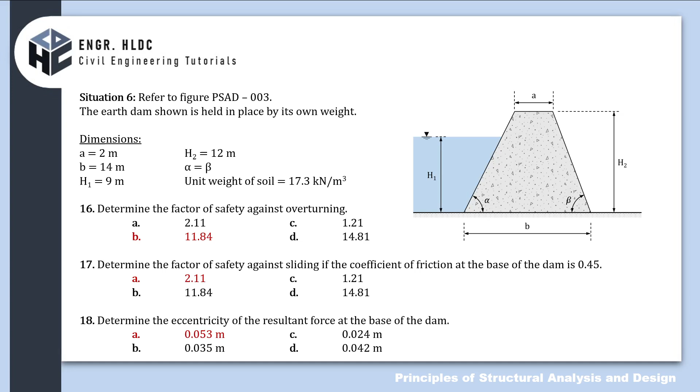Situation 6: refer to the figure. The earth dam shown is held in place by its own weight. We have dimension A equal to 2, base dimension B equal to 14, height of water on the upstream side is 9 meters, and total height of the earth dam is 12 meters. Alpha is equal to beta, so this becomes a symmetrical trapezoid. The unit weight of the soil is 17.3 kilonewton per cubic meter. What is the factor of safety against overturning? Next, the factor of safety against sliding with coefficient of friction 0.45? And determine the eccentricity of the resultant force at the base of the dam.

You might say, sir, analysis of a dam should be under hydraulics and geotechnical engineering. Supposedly, that's how it should be. However, this is from the board exam, so literally it appeared under structural. Why is it under structural? Maybe because what we're analyzing here are forces, and forces fall under engineering mechanics. So basically that's probably the reasoning of the examiner for including this in PSAD. But we can definitely handle this, class.

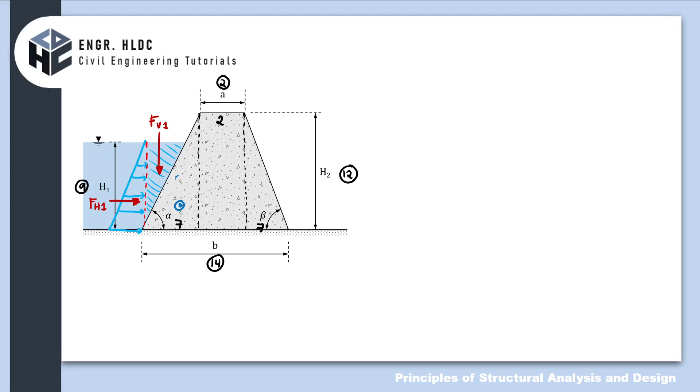Let's call this Weight 1. The centroid of this rectangle is here—let's call it Weight 2. And the centroid of this is here—let's call it Weight 3. Since our section 1, class...

Okay, wait. Since section 1, which gives us W1, is the same as section 3, which gives W3, we can say that W1 equals W3. Also, nothing was mentioned about uplift, so we don't need to consider it.

Alright, let's solve the forces one by one. For FH1, as you may remember from fluid mechanics, it is gamma times H-bar times area. We consider the area as the vertical projection of the dam wall. In this case, gamma is 9.81 kilonewton per cubic meter, and H-bar would be half of the total height of 9, so it should be 9/2.

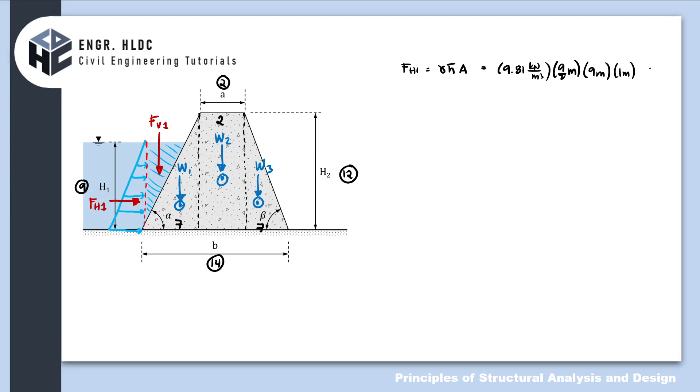And then, area perpendicular to the paper would be 9 meters high by 1 meter width. So, let's store this as letter A.

Okay, so next class, FV1 is the weight of the real fluid, which would be represented by gamma times volume. So we have gamma of the fluid is 9.81 kilonewton per cubic meter. So what would be the volume? Let's start with the cross-sectional area.

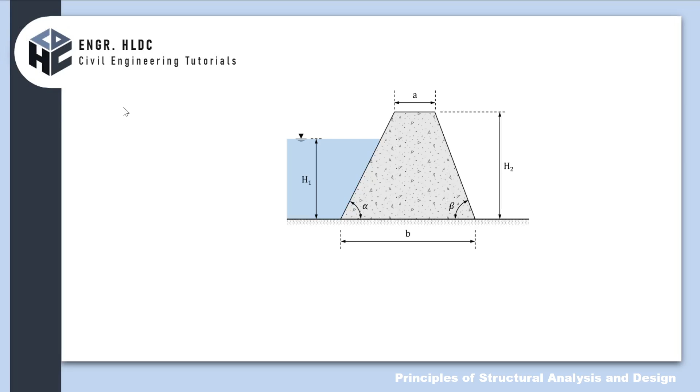Next, weight 1, it's the same thing, gamma times volume. But in this case, since we're dealing with weight of the dam, read carefully class, because it might be mistaken for concrete. It says earth dam, meaning it's made up of soil. So the unit weight we'll use is that of soil, not always concrete. Let's use 17.3.

I didn't put the units since we already practiced that on the first two. So gamma times volume: 1/2, base is 6, height is 12, considering 1 meter width. Let's put this as C. And then weight 2: gamma times volume, again 17.3, with volume being 2 times 12 times 1. Let's store this as D. And weight 3, by symmetry, it's equal to weight 1, so this is the same as C.

Okay, let's start, class. Let's talk about factor of safety against overturning, call it Fs sub O. Factor of safety in general is the ratio of the resistive forces, or your allies, divided by the forces that will cause the failure.

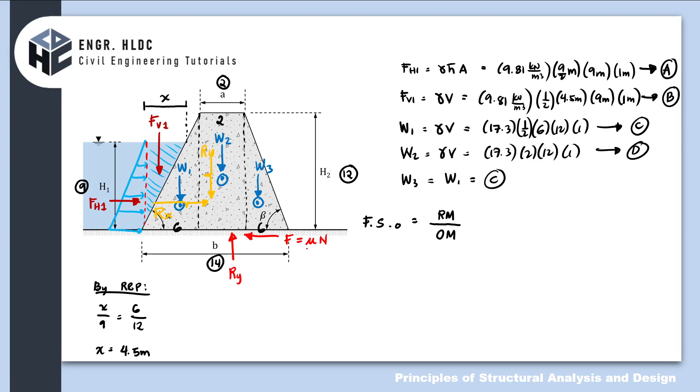Basically, this friction offers Rx too, provided Rx is small enough. But let's talk about the limiting value of friction. From your statics, class, the maximum friction that can be developed may be the value of mu times N. Remember, this is called the limiting static friction. Let's be specific: this is mu sub s times the normal force. This means it's the maximum amount of friction it can offer, but it doesn't mean this is automatically what it offers.

For example, say the force is only 100 kN, and its capacity is 500 kN, then it only offers what's needed, so if it's 100, it offers only 100. The purpose of this limiting static friction, as you may remember, is to know whether it will slide or not. For example, if the limiting value is 500 kN, but the horizontal force here, resultant Rx, is 1,000, then because the push is stronger than the resistance, it has no choice but to slide.

Okay, I think we understand that now, class. So let's put it here. Who will be Rx? Our Rx is basically just FH1, which we already stored in A. While our Ry would be the summation of all vertical forces, that would be B plus C plus D plus another C — that is, FV1 plus weight 1 plus weight 2 plus weight 3. That would be the next step. Actually, first step: solve the forces. Next step: solve the resultant/reaction.

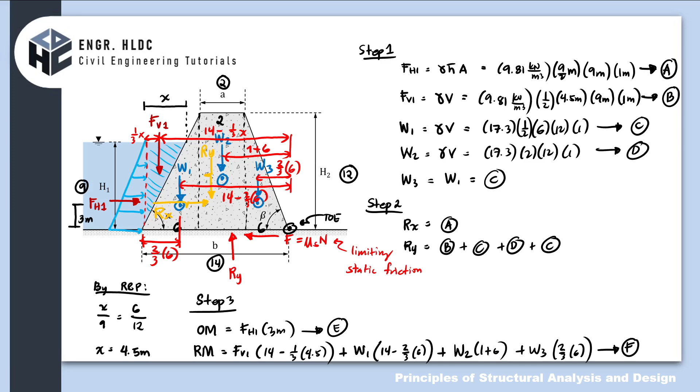Okay, so what do we do first, class? Let's store this first. So we have 9.81 times, which is like 9 squared, divided by 2, and then times 1. I won't type that out, let's just store it in A.

Alright, so next, 9.81 times 0.5 times 4.5 times 9 times 1. 9.81, 0.5, 4.5, 9. So store that in B. Okay, next, 17.3 times 0.5 times 6 times 12 times 1.

Let's put that in C. Next, 17.3 times 2 times 12 times 1. Let's store that in D. So next thing to store is the moments.

So FH1 is the value stored in A, times 3. Let's put this in the overturning moment, E. Next, FV1, which is stored in B, moment arm 14 minus 1/3 of 4.5, plus W1, which is stored in C.

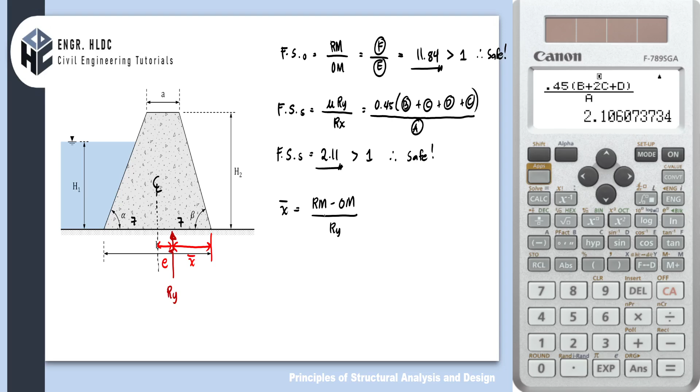I'll just show you the formula, class. To solve for x bar, it's the resisting moment minus the overturning moment, divided by Ry. It's like applying Varignon's theorem there, class. So we get the x bar.

And then, as you may remember, since generally speaking, we call this B over 2, the eccentricity is B over 2 minus x bar. That's how we approach it. I'll put an absolute value because there are instances where x bar is larger than B over 2.

Okay, so what does this become, class? X bar would be the resisting moment stored in F minus the overturning moment stored in E, divided by our Ry, which is B plus 2C plus D. Whatever this is, put it in X. Then this becomes B over 2, so 14 divided by 2 minus the value in X.

Okay, let's calculate. F minus E divided by B plus 2C plus D - this quantity goes into X. Then 14 divided by 2 minus X. So there we have it, our eccentricity is 0.0534 meters.

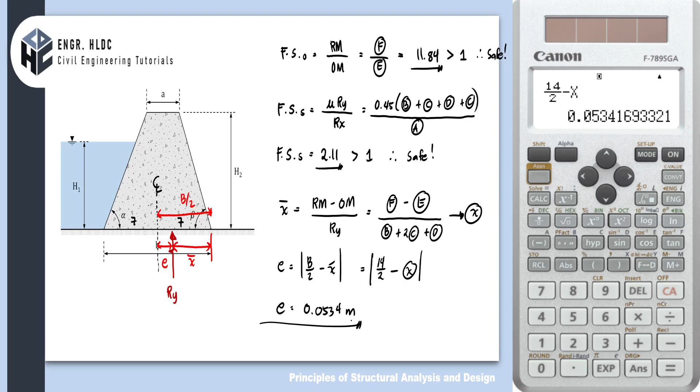Okay, so are we correct? Okay, correct. Alright.

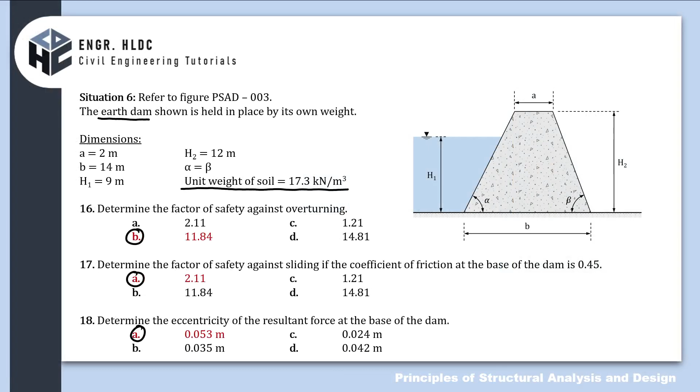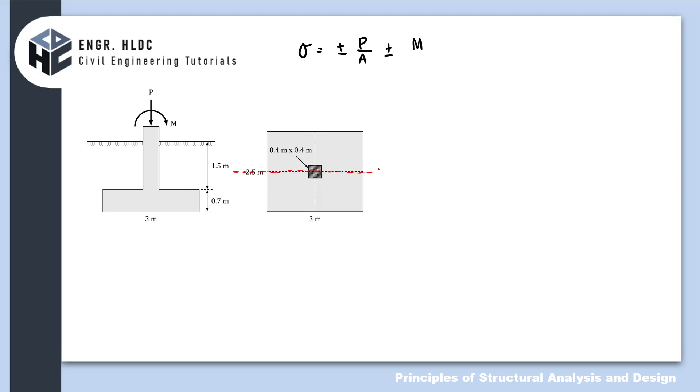So suppose this is our x-axis, and this we'll call the y-axis. So in a sense, the moment is positioned here like this, which means it is a moment about y. Got it? Okay, this is a moment about y. So if it's about y, its partner, class, would be the x distances, and the I we need would be the moment of inertia about y. So we have IY.

Alright. Okay, so...

Pag-usapan natin, class, due to the pure compression, axial force P, we are expecting na meron na ditong uniform soil pressure. Okay, so ganyan siya.

Okay, but with the presence of the moment, as you may see, tignan mo lang, class, kung paano umikot ito. As you can see, dinidiinan niya yung portion na nandito sa right side, while itong nasa left side, parang hinuhugot pataas. So which would mean, di ibig sabihin, okay, dito, mako-compress.

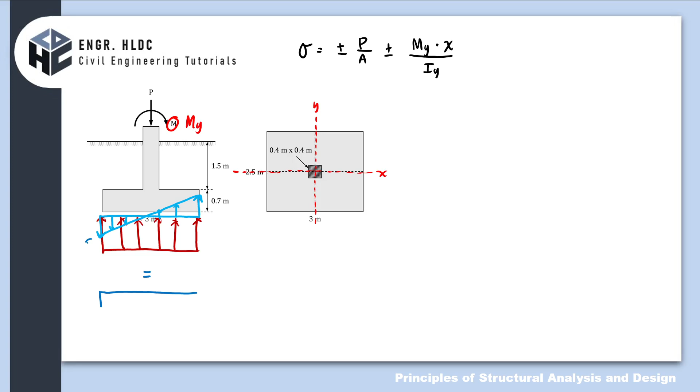Okay, so ibig sabihin, yung mga portion sa may left, na-decrease, no? While yung mga portion na nandito sa right, nag-increase yung soil pressure. Which would mean na ito yung magiging equivalent figure. So dito, medyo lumiit, yung natira na lang dito. While this one, malaki. So gawin natin ito.

So this is with the assumption na still, may natira pa rin compression. So be-verify na lang natin mamaya kung still nako-compress pa ba tong side na to. Kasi may tendency yan, class, na sa sobrang laki ng hugot na tension, mauubos yung compression. So may ganong senaryo.

Okay, so ito yung magiging Qmax. Kumbaga, ito yung critical na dapat, that the soil must be able to sustain this amount of soil pressure. So ito naman sa kabila yung Qmin. Okay, so sige, paano gagawin, class?

So Q is the same as to sigma notation dito, siya lang din yung Q. Okay, so let's start with Q is equal to, ano nga yung force? I believe this is 1200 kilonewton. So balikan muna natin, ano yung MY? 360. Okay, this one here is 360 kilonewton meter.

Okay, so dito po tayo sa point na nandito, class, for maximum. So that is either this or this. Basically, they will share the same amount of soil pressure, kasi isang bending lang meron tayo, moment about Y lang. So Q would be, so let us use...

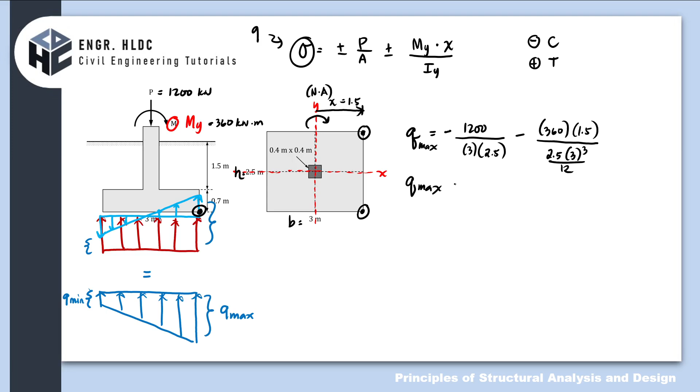So this would be our Qmax. Okay, maximum soil pressure is, okay let's use our calculator. Negative 1200 over 3 by 2.5, then minus, okay, 360 times 1.5 over 2.5 by 3 cube divided by 12. So we have negative 256.

Okay, kPa ang output. So yung negative dito, class, hindi na natin masyadong papansinin sa susunod na calculation. But what we know is that negative, ibig sabihin, nako-compress yung lupa. And then that is okay, kasi yung lupa, may kapasidad talaga yung mag-resist ng compression. Pero pag tension kasi, yun yung hindi kaya ng lupa. So yun yung i-check natin on the other side.

So for the Q minimum, yun po yung nasa left side. So nako-compress pa rin naman yan due to the force P. So still negative 1200 over 3 by 2.5.

So the only difference is that due to moment, nahuhugot po siya. So tension po yung effect. So positive 360. So we are talking about the point here, na represented sa plan view nito saka nito.

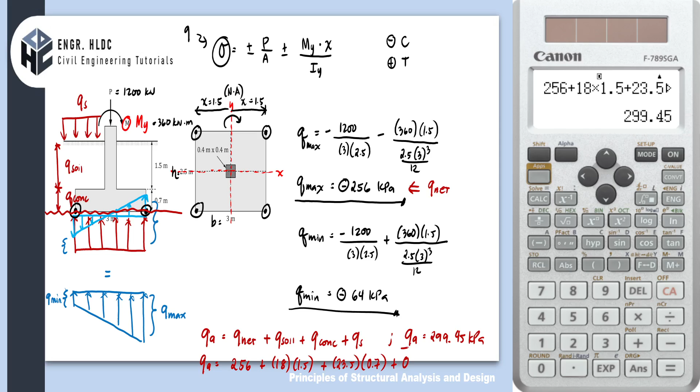Alright, so are we correct? Okay, so the nearest from the choices is 300. So we are correct.

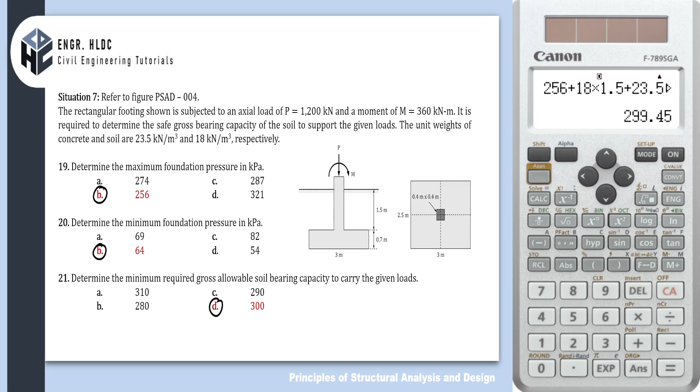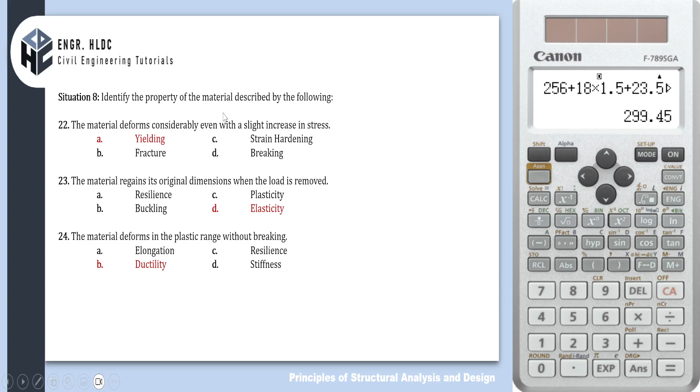Next, these are just terms, class. So identify the property of the materials described by the following. In the board exam class, there are terms that come up too, so it's important that you are familiar with the terms usually used in the field of engineering.

First, the material deforms considerably even with a slight increase in stress. So the answer here is yielding. This is what class sees in the stress-strain diagram, where it continuously deforms or develops strain in the material even with a small increase in stress. So we call it yielding already. Okay, the material regains its original dimension when load is removed, so if it returns to its original shape, therefore we are still in the elastic region, so it is defined as the elasticity of the material.

Okay, and then the material deforms in the plastic range without breaking. So this material property is what we call ductility - the capacity of the material, actually the other term for this class is that you can make it into thin wires without breaking. So usually ductile materials are like steel.

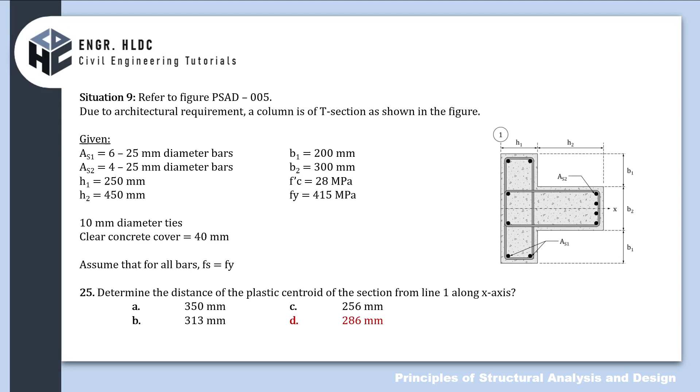So this is line 1, the face here on the left side. So how far is the plastic centroid? So class, what again is the definition of plastic centroid? So plastic centroid is like the location where if you place the force, we would expect uniform stresses to develop in our material. Alright? So it's like we're just looking for the centroid of this, class, but with the consideration of forces. Okay, so how do we do this, class?

Actually, the solution here would involve modeling it in mode 3-2, with the frequency turned on. Actually, mode 3-1 would work too for this scenario. This is fine. Mode 3-1 is optional.

Okay, wait lang, burayin natin. So, pwede na nga rin si mode 3-1. It is up to you kasi yung y-axis or yung column ng y, hindi rin kasi natin magagamit due to the symmetry of the structure. Okay, ano bang gagawin natin? So, mode 3-1 tayo, class.

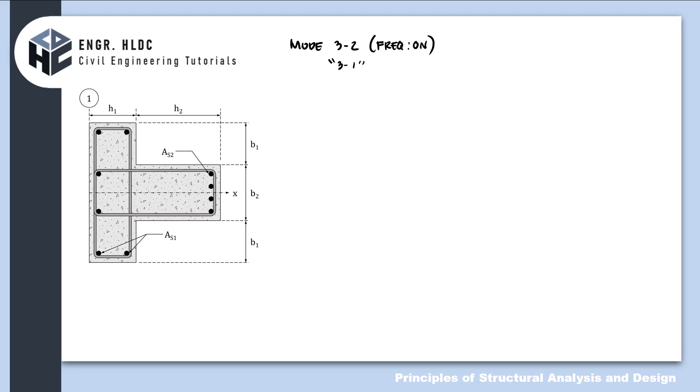Okay, punta muna kayo dito. Mode 3-1. So, kailangan naka-on yung frequency. So to do that, shift mode down, and then 4 stat, and then frequency on 1.

Okay, anong gagawin? So, basically, sa X, dito natin lalagay yung coordinate ng centroid. Tapos, sa frequency, diba usually nilalagay natin dito yung area lang. Pag centroid lang, no? Kapag ganun kasi geometric centroid ang tawag, pag area lang ang reference mo. Pero kapag kino-consider mo yung strength of the material involved, so plastic centroid nga siya, no?

So, ang ilalagay natin dito, class, is yung force. Okay, so how do we get the force? Depende, no? Kapag concrete, edi 0.85 F'C area ng concrete. Kapag steel, edi AS, tapos multiply natin sa Fy.

Kuha? Okay. So, anong gagawin natin, class? Let us divide the figure into shapes na madaling malaman yung area as well as madaling malaman yung centroid. Okay, so ganito, ito yung magiging division natin, class, no?

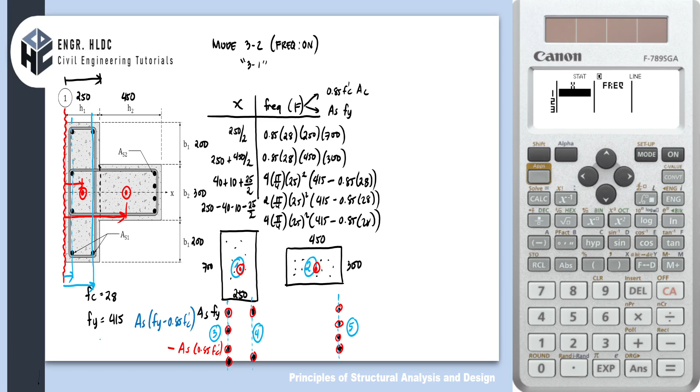Okay, I have no more space, let me adjust. Last line, I believe this is also 4 bars, 25mm. So 415 minus 0.85 times 28.

How far is the centroid of this steel group measured from reference line 1? Again, our approach is total distance first. The total distance up to the end is 250 plus 450, which is 700. Then subtract: cover, diameter of hoops, minus half of the bar diameter, 25 divided by 2.

Okay, let's list this in our calculator. We have 250 divided by 2. Then 250 plus 450 divided by 2. Next, 40 plus 10 plus half of 25, so 12.5. Next, 250 minus 40 minus 10 minus 12.5. Then last, 700 minus 40 minus 10 minus 12.5.

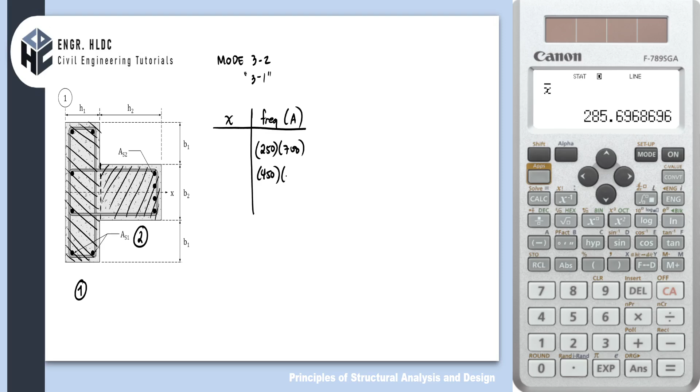Yung pangalawa, 450. Saka yung B2 niyan ay, as I remember, 300. Hanapin mo yung mga centroid nila individually. So ito yung centroid, ito yung centroid. Dito tayo nagsusukat, ito yung reference line natin. Sukatin mo lang gaano kalalayo. So ano lalagay? Eh di ano to? 250 divided by 2, tapos 250 plus 450 divided by 2.

Okay, so just try to look for the value of x bar once again. Actually we can store this, kung magiging importante pa siya mamaya. Okay, so mode 3, wait lang, mode 3.1 po ulit tayo. So we have 250 divided by 2, 250 plus 450 divided by 2. Areas are 250 by 700 and 450 by 300. So shift stat var X bar, so we have 277.42.

Okay, so slightly magkaiba sila nung kanina, no? So nasa na yan? 277. So the nearest once again, nearest whole is 277. Okay, so hindi talaga usually nagko-coincide, but mas magkalapit lang. 285 plastic centroid.

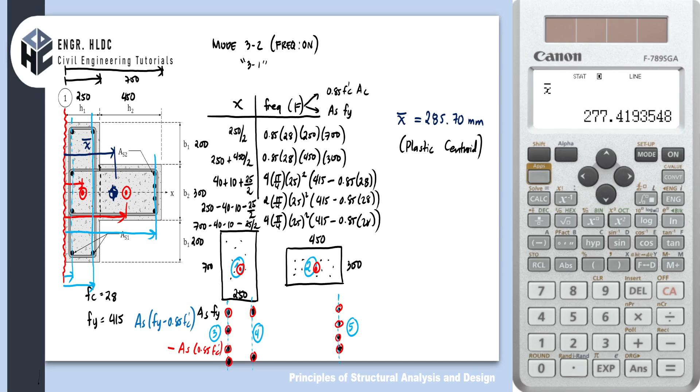Kaya ano nga ulit ibig sabihin? Na kapag yung load nilagay mo sa plastic centroid, we will assume na uniform po yung stresses. Sabihin yung lahat ng concrete all throughout is nakakaramdam ng 0.85 FC prime, and then lahat ng steel nakakaramdam ng sabay-sabay na FY. Parang ganun lang po, class. Okay, so ito naman, geometric centroid.

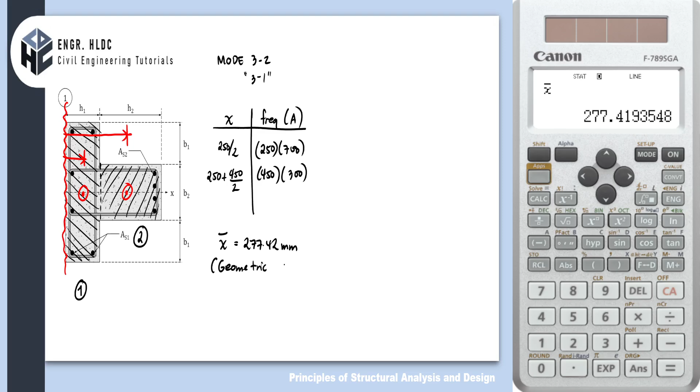So next question: what if meron daw ultimate load 4155 na tumatama at 420 mm to the right of line 1. So lagay natin dito, may PU dito na. Ay, wag na tayo dito mag-drawing, I think may enlarge ko naman yan. So ano daw yung magiging resulting bending moment? Dito na magiging importante yung plastic centroid. Di ba nandito nga yung plastic centroid, class? So gaano nga kalayo to?

So ito yung calculated natin kaninang nasa A, 285.70. Ngayon, ang load nandito daw po, class. Si summer here, PU, which is 4155 kilonewtons. And then its position is 420 mm, so parang wala siya dun sa sentro. Eh di ba ang property lang naman, kapag nasa sentro kasi ang force, therefore magiging axially loaded member po siya, walang moment involved. Pero ito, since merong nabuong eccentricity, so eccentricity is the distance ng location ng force from the considered center, ito yung E. So merong madedevelop na moment. At as you may remember, moment is force times the eccentricity E.

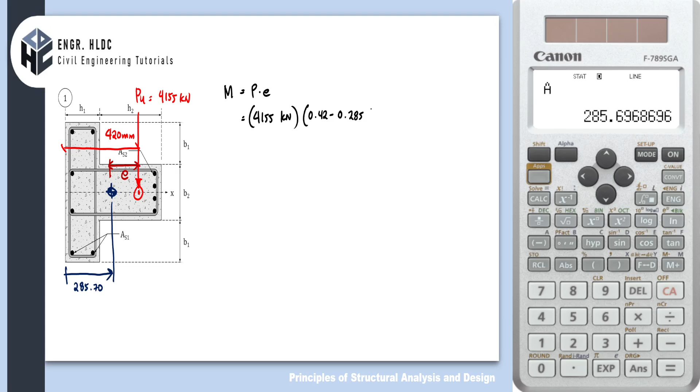So kunin natin yung force, 4155 kilonewton. Eccentricity from the figure is 420 minus yung 285. Kaso, I believe naka-ano to, ayan, naka-kilonewton meter yung answers. So gawin ko ng meters. So I have here 0.42 minus 0.28570, and then this is naka meters na.

Okay, so what would be the moment? Sa calci parang ganito lang yan: 4155 quantity 0.42 minus yung nasa A. Kaso naka mm yun, so divide ko ng 1,000. Ayan, sagot: 558.03 kilonewton meter. So this should be the answer, wherein the nearest is letter A.

Okay, so most likely, pag mga ganitong hindi saktong-sakto, so you may try to use yung previously calculated value. Di ba dito, naka-round off na siya, 286. So try nyo, class, what if yun yung ginamit? Pero kasi, as I remember, pag nagpapa-exam sa PSAD, mga exact quantity yung ginagamit. So try nyo na lang din, class, kung medyo duda kayo, so try nyo yung nasa choices na 0.286, yung naka-round off na. Magkano to? Mas malapit, 556. Okay, but anyways, the concept is the same, so that would be our answer.

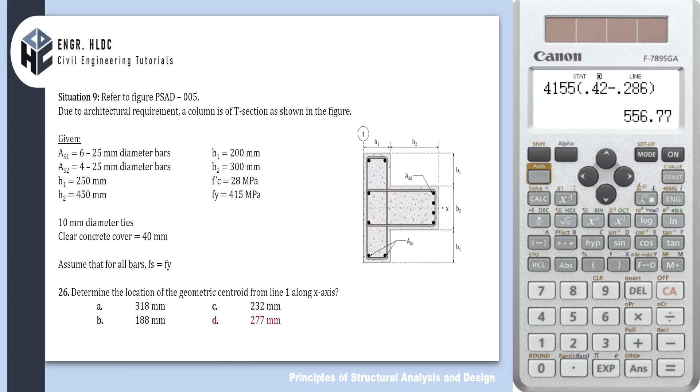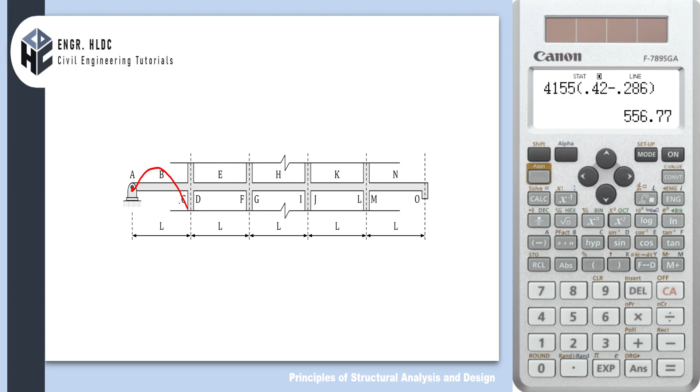Let's go back to the figure. With respect to the moments, as we may remember, when the end is pinned or on a roller, the moment there is automatically 0. Then gradually, going somewhere in the middle it becomes positive, then negative at the support. So it goes negative, then positive, then negative, repeating this pattern throughout, and the same happens at the other end.

As you may remember, for moment we automatically have W L squared. What's missing is the denominator. So using the NSCP coefficients, the ultimate moment MU may be approximated as W L squared over something. Let's focus on that denominator. Here it's automatically 0 — this is just practice for us.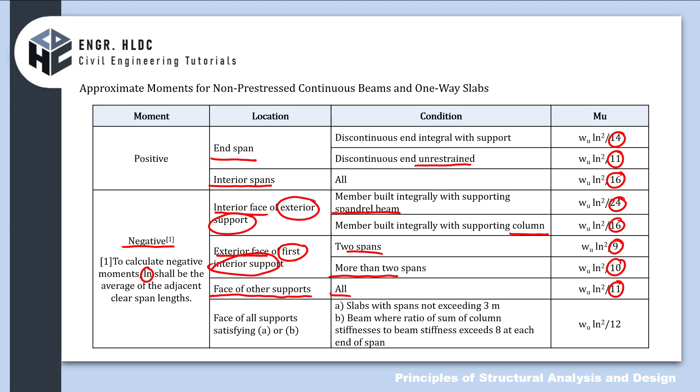Okay, so i-highlight ko rin pala, class. Importante ito. Ayan, that is W ln squared divided by something, where ln is the clear span. So kunin muna natin, class, yung mga clear span. Halimbawa dito, ln1, sabihin ko itong ln2, ln3, ln4, ln5. So when you say clear span, you have to deduct the dimension of the supports.

So dito, ln1 is, magkano nga yung L? Center to center is 4.5. Okay, so this one here is 4.5. Diba sabi, ito ay parang nakatungtong sa column, diba? Column na 500 by 500. So half ng 500 sa A, half ng 500 sa may C. So parang minus 500. 4,500 minus 500, magiging 4 meters ito.

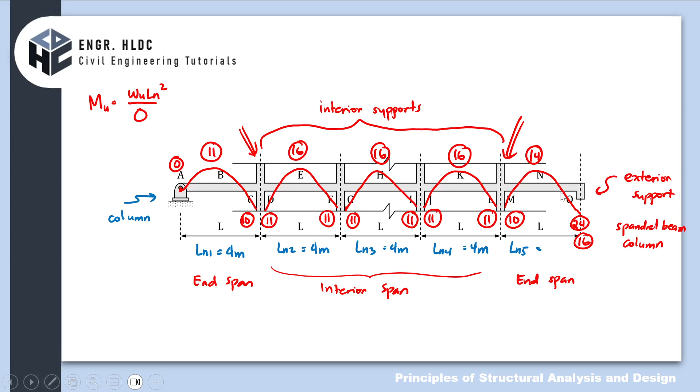So the same applies here, half of the column from both ends, diminus parang 500 lang din. So tig-4 lang ito, tig-4 except this. Kasi dito, 4.5 minus kalahati ng 500 sa may M, but sa O kasi, is spandrel. So ano yung babawas doon? Kalahati ng 300. So syempre, kakalki tayo.

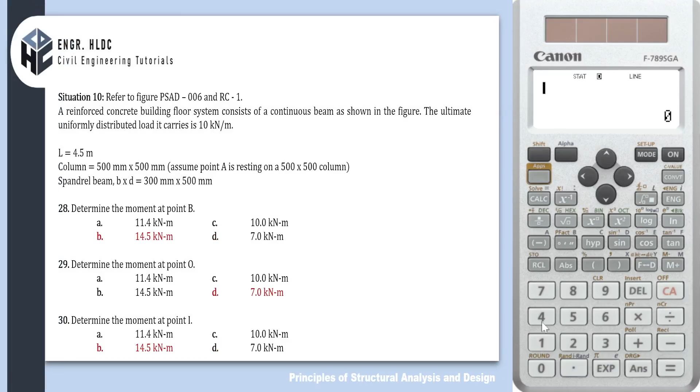Kano yun? Okay, balik tayo ng mode 1. 4.5 minus ng kalahati ng 500 at M, and at the other end, kalahati ng base dimension na 300, so divided by 2. So how much is this? 4.1, okay. So this one here is 4.1 meter. So dito pipiliin ko, class, yung 24 kasi sinabi is spandrel beam.

Okay, so sino mga tinatanong class? B, O, I, so focus na tayo. Okay, so moment at B would be W, ilan nga yun? 10. So lista muna natin, oh, yung given. W is 10 kilonewton per meter. Okay, so we have here 10. Okay, huwag tayo dito magsulat sa taas. Dito na lang, MB. So W10, length is

4, and then squared over. Ang over niya ay 11. So MB equals 10 times 4 squared divided by 11. So we have 14.55. So ganun lang kabilis, no? Kilonewton meter.

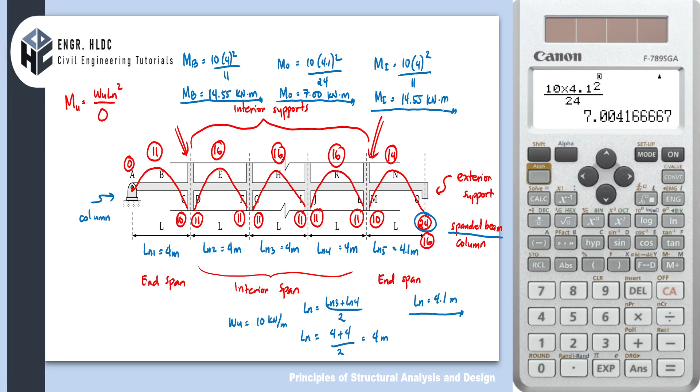Alright, and that's it, ganun lang naman, class. So let us check if we are correct. So check, check, and check.